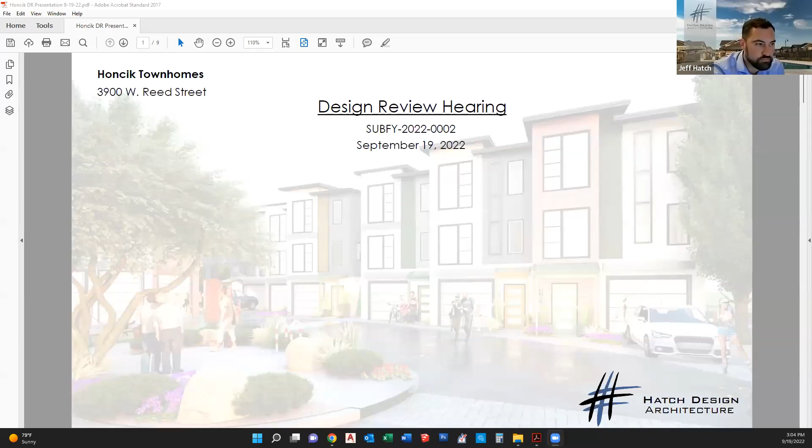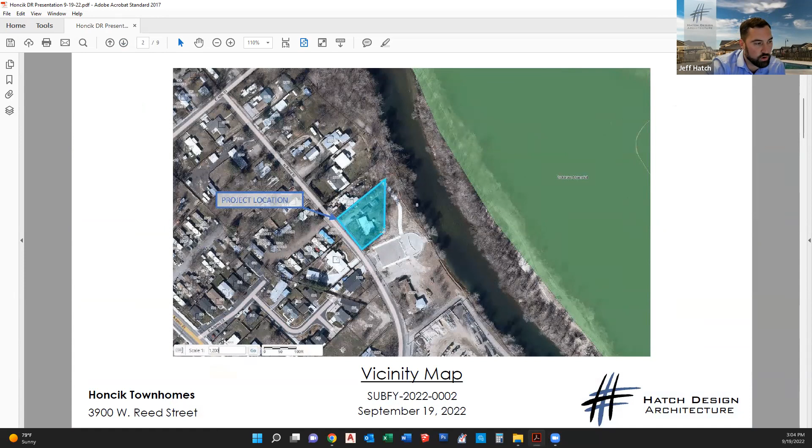Thank you for your consideration of our design review application. From our last hearing, the request was primarily to clean up and clarify documentation, so I wanted to briefly go over what we've done the last two weeks. As far as the site, just to familiarize ourselves, we are adjacent to Heron Park. This property is actually owned by the city and is part of Heron Park. Last time we talked about the enhancement of the pedestrian pathway and how that connectivity resolves the issue of not having any public connection to that park from the sidewalk.

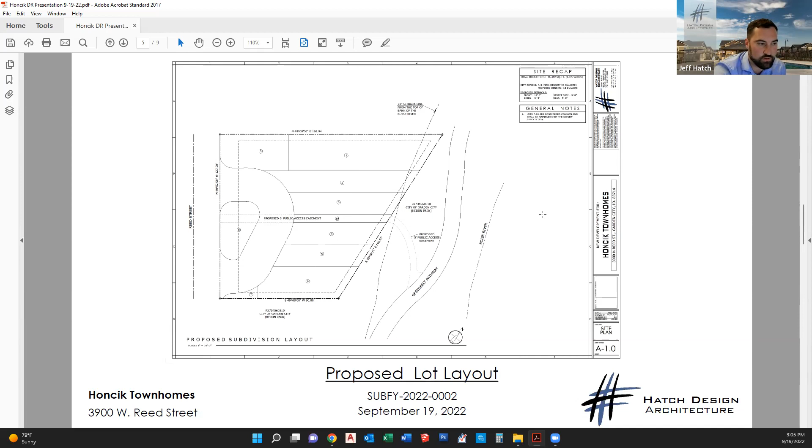One of the coordination questions was in regards to the common lot areas. One of the late exhibits is the actual layout of the property lines and the common areas, so that we could highlight and justify the tabulated calculation to city staff as far as how we came up with our justifiable square footage for our common areas. The other request was to engage the city and be able to provide the committee with a mechanism as far as how we would go about acquiring the public access we are proposing. In discussion with city staff, it looks like we would have to request that access from the city council. So that would be something we'd be fine proposing as a condition of approval, which we would then present after our P&Z and subdivision applications are processed.

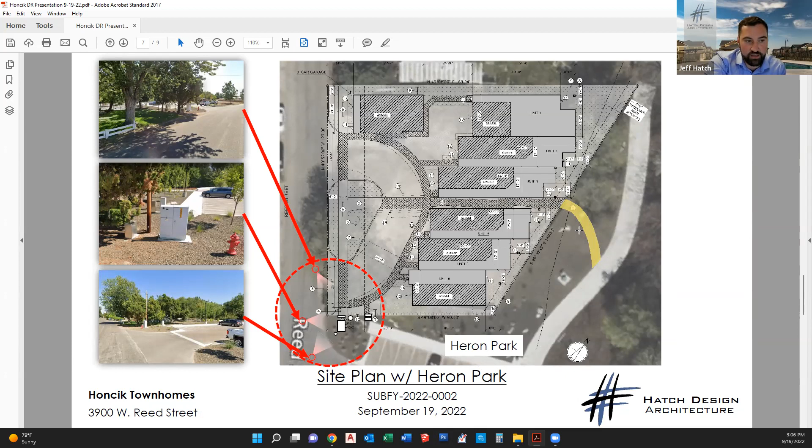So at our last hearing, we discussed some of the complexities of trying to route a public sidewalk in this manner, which provides the access through the center of the property. There was some discussion about potentially meandering this back to the public sidewalk. I would probably leave that to the discretion of city council, since they're the ones approving that, but in general we would be conditioning to provide a public access connecting to the park.

So in summary, the three primary design review related items: the question about the open space — we've tabulated our open space at a total of approximately 13%, so we're able to justify that. Question about the parking — parking proposed will be on the common lot, which we've now provided a clear exhibit as far as that intention, and that can be coordinated with the HOA. And then the engagement with Heron Park and the Greenbelt, provided in those exhibits as far as how we would have that, and in addition we are proposing publicly accessible labeling and wayfinding for that access.

In addition to what we've summarized here, all the documentation has been coordinated with Hanna. To the best of my knowledge, the site plan now matches the landscape plan, matches the elevations, so all that stuff has been clearly cleaned up and identified in a more proper manner. And with that, I will stand for any questions.

Thank you. Any questions for Mr. Hatch?

None of the modifications or additional documentation addresses the elephant in the room that we keep coming back to, which is the street front presence and street front engagement. Is that correct? That is correct. Okay, thanks.

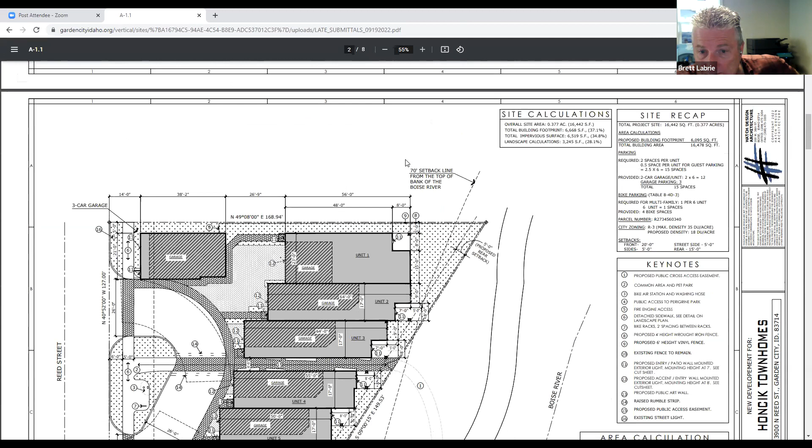Hannah, can you scroll back to the landscape plan there? Next one down, maybe. Oh, next one.

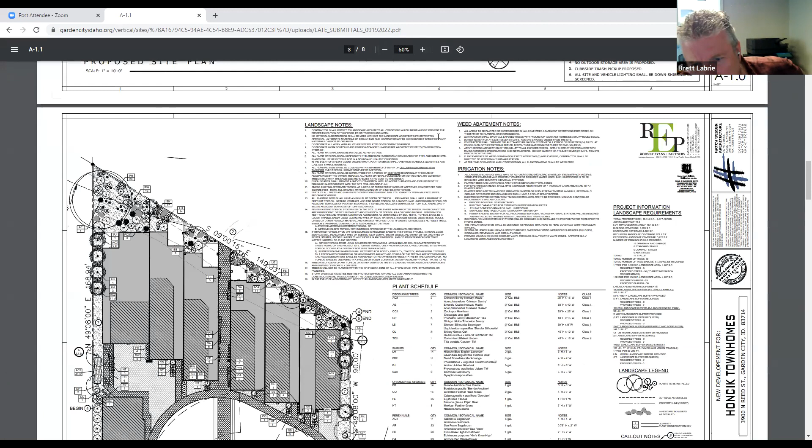So I was looking at that first page in the submittal packet, and it looks like they have isolated the guest parking space onto its own lot. I'm not sure what lot 7 right here is intended to be, or 8, but it looks like the common drive isn't its own lot.

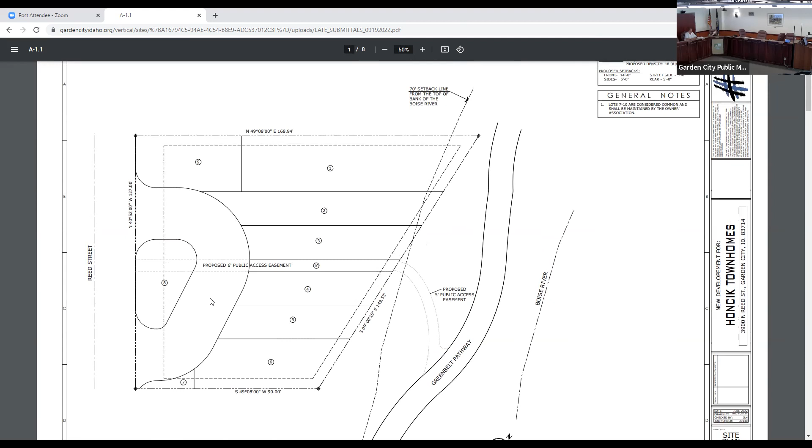It's a little difficult to interpret, so still not enough information to review. So we could leave it in and then that could be addressed as a condition. Potentially, yep.

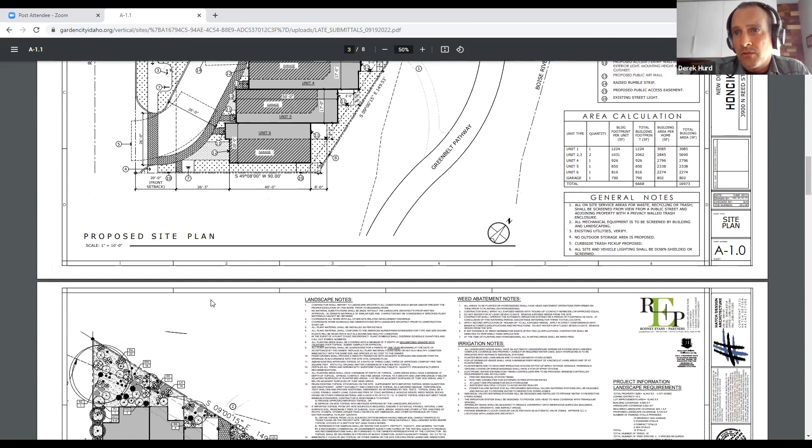Then the next item's 84L3, and that's open space - talking about removing all mature trees. No easements.

And so maybe, because now it does connect to Heron Park, we can strike that section. Yeah, I think scroll up further, Hannah.

Can you go up just a little bit further?

I guess that stays because there's still no easement. It stays, but it could be conditioned later to develop an actual easement with the city. It's kind of a timing and process thing. So maybe the connection to Heron isn't applicable anymore, but the lack of easement is still applicable. Yeah, so we can strike. We're not going to strike from the staff report, but 84L3 still stays. Yes, it does.

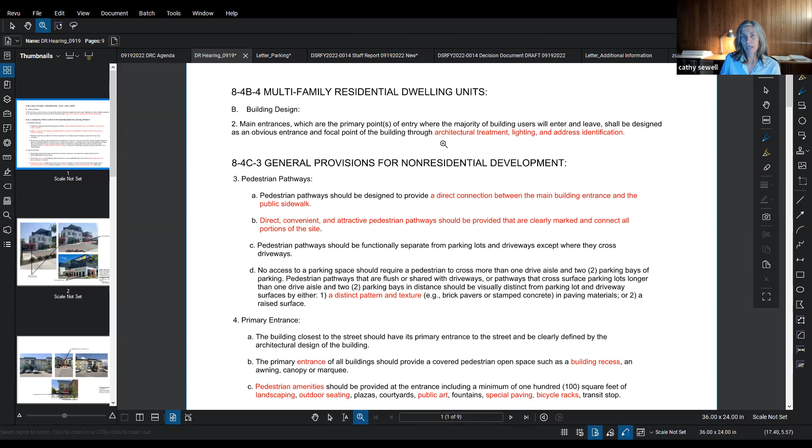I wanted to highlight and quickly go through the non-residential provisions. We do think the pedestrian pathway applies, because it mentions building entrance—a direct connection between the main building entrance and the public sidewalk. Once again, we don't necessarily have a main building entrance, but we do have entrances that have a direct connection to the street or sidewalk.

Direct, convenient, attractive pedestrian pathways should be provided, clearly marked, and connect all portions of the site. This section D gets into when you have people and cars intermingling a little bit, trying to create some distinction between those pathways. I highlighted this section here, which we'll show in our plan—a distinct pattern and texture.

The primary entrance, item A, the building closest to the street, seems to allude to there being multiple buildings. For us there's just one building, but the primary entrance of all buildings—once again we just have one—building recess.

And then here are just some around that entry with non-residential landscaping, outdoor seating, plazas, courtyards, public art, special paving—all these things considered with non-residential development.

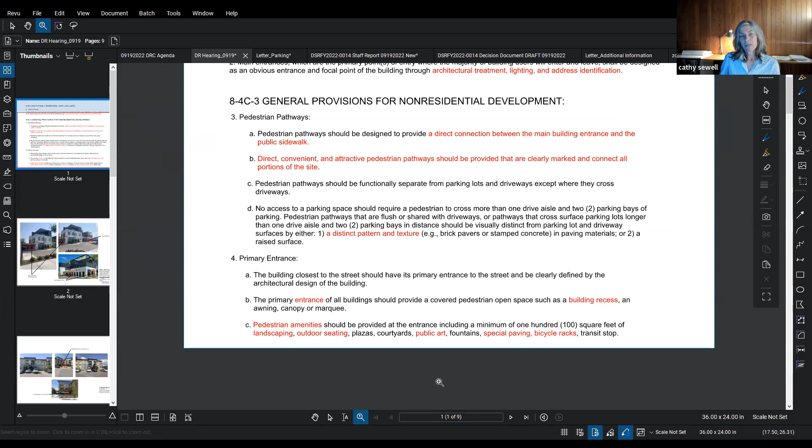So as I mentioned, we tried to find some projects that were of our scale, mixed use, multifamily. The first one we found, right around the corner from us at 35th and Clay, is a mixed use development. Property size is basically what ours is, around 12,000 square feet. This project, however, was reviewed as non-residential under code section 84C, even though there are residential components to it.

The non-residential use on the ground floor is about 1,700 square feet. On the second floor—this is the original application, I know it has changed—the non-residential portion on the second floor and residential use is about 1,100.

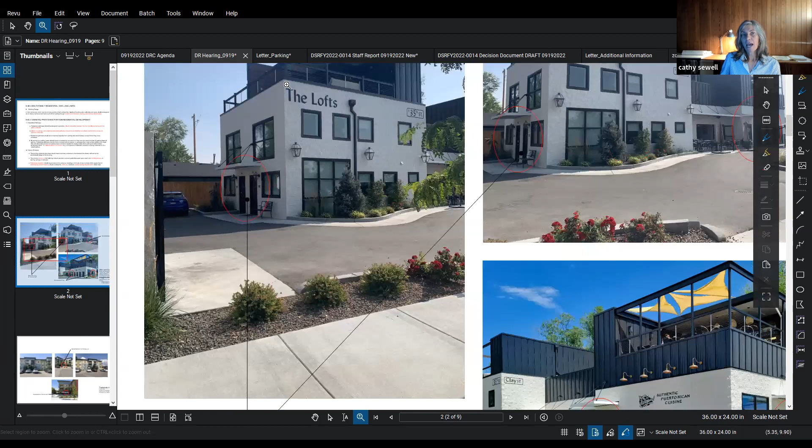So here we're looking at how the applicant handled the residential entry to this mixed use building. On this side, there are 2 units, and this is their residential entry. In terms of architectural treatment, there's a canopy noted, some lighting, and building identification or addressing associated with that.

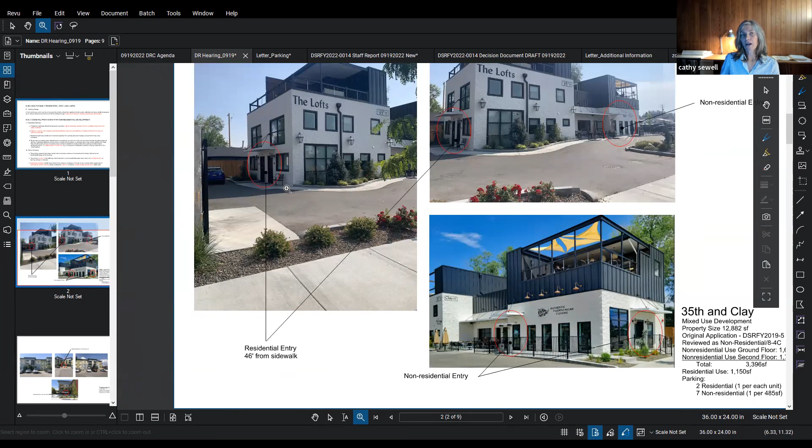One item of note: our entry into the residence is around on the side. This residential entry is approximately 46 feet from the edge of the sidewalk. Our proposed project has a residential entry of around 30 feet, so we're actually a little closer than they are, with a direct footpath—our entry, as opposed to theirs across a parking lot.

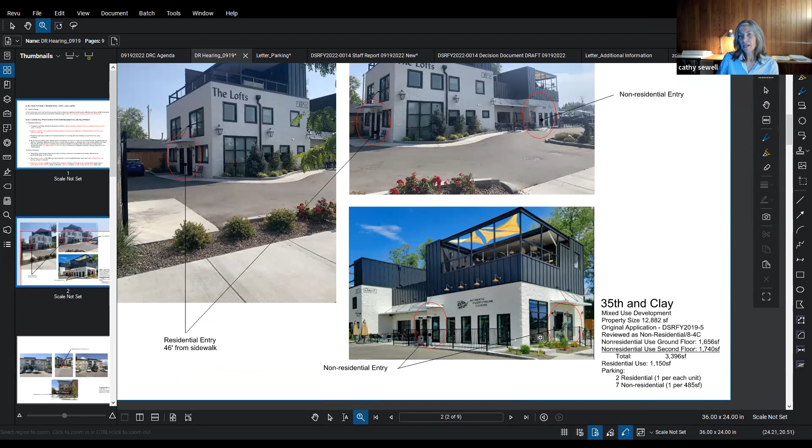I just wanted to note the non-residential entries. There's one facing 35th and one facing Clay. Both are articulated similar to the residential one, with a canopy, some addressing, and light fixtures. There's a direct path connecting to the sidewalk along Clay, but on 35th Street there's no real direct connection—there is an ADA access aisle, but that's part of the paving system.

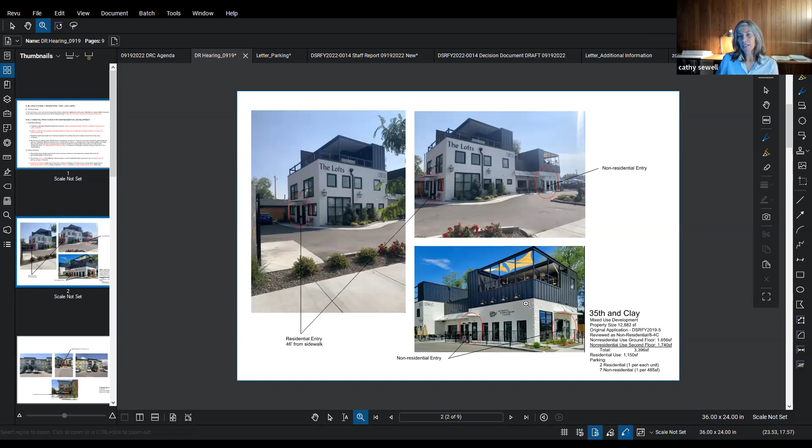So this project we thought was relevant since it's mixed use, right around the corner in our neighborhood, and small scale. The next project we looked at was Trailwinds. This one has been mentioned in the staff report primarily for parking, but it's a full multifamily development, much larger in size, over 2 acres, with 68,000 square feet of residential use. This is over off of 42nd.

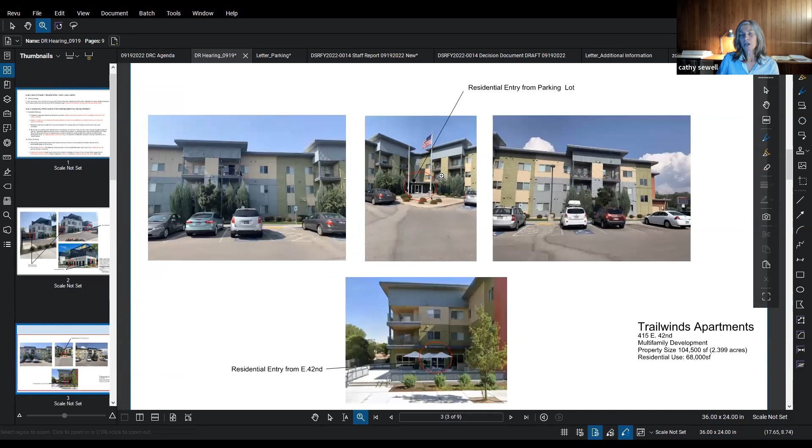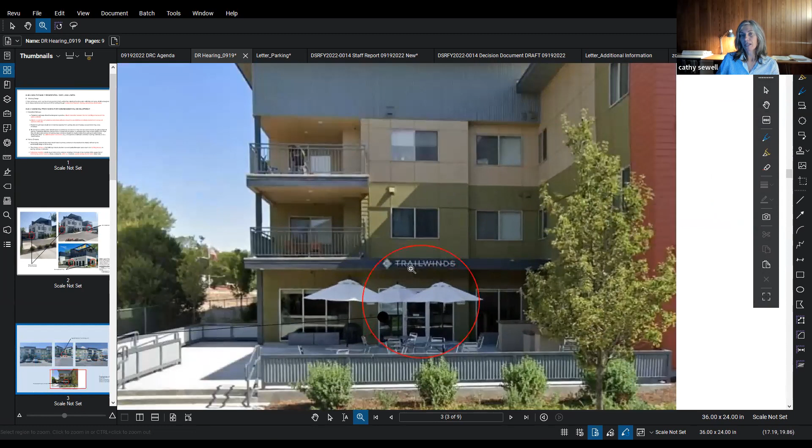They have 2 entry locations. The first has a big parking area—this is the residential entry, with articulation of the entry including a covered entry and signage. Then there's the other entry element off of 42nd, similar to the one off the parking area, with signage, canopy, and sidewalk connection to the entry from the street.

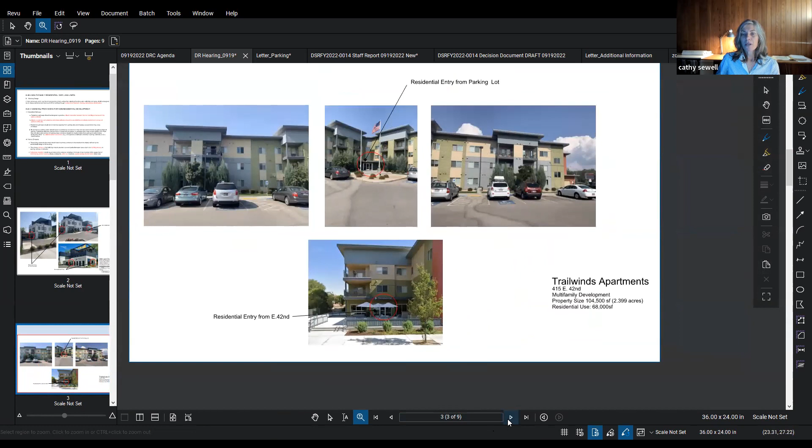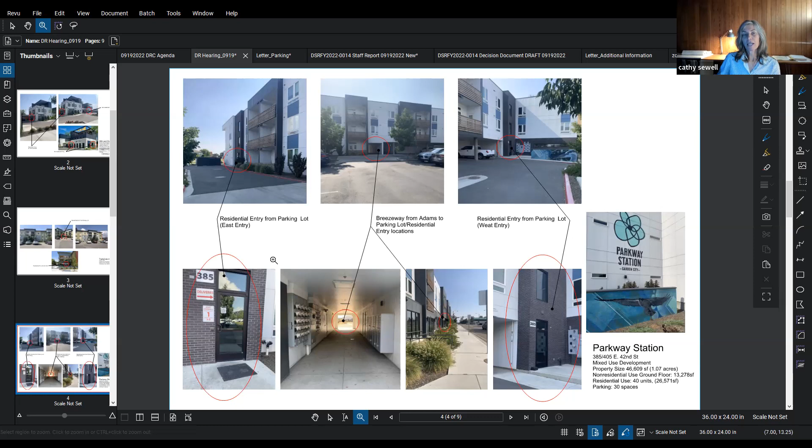The next project, right adjacent to this one, is Parkway Station. This is a mixed-use development on 1.07 acres, with non-residential use on the ground floor of about 13,000 square feet and 40 residential units. We only counted 30 parking spaces, which we thought was interesting given the number of residential units and non-residential use. I don't know how that was calculated, but there's definitely not one parking space for every unit.

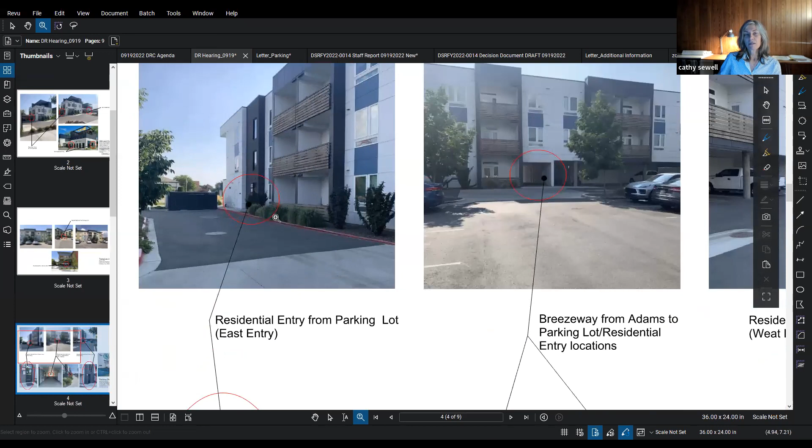But I just wanted to note how the residential entry locations are articulated. Both entries into the structure for residents are off of the parking lot. There's the east entry here, which I think uses brick to articulate the entry, with addressing down here. Then here is the west entry element, once again with brick detailing and some addressing at the door.

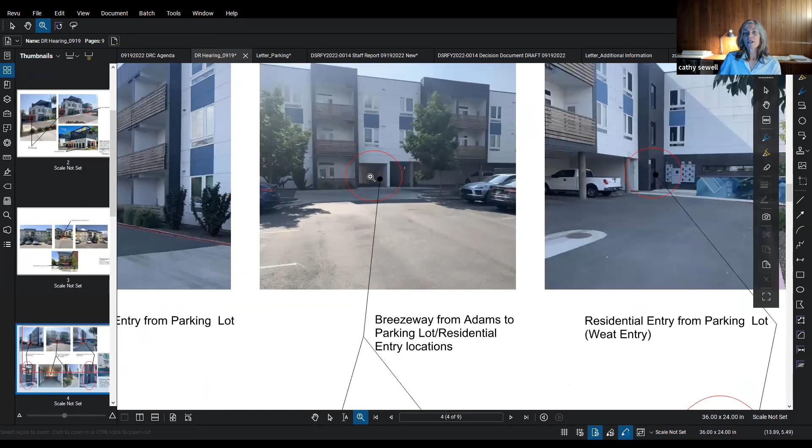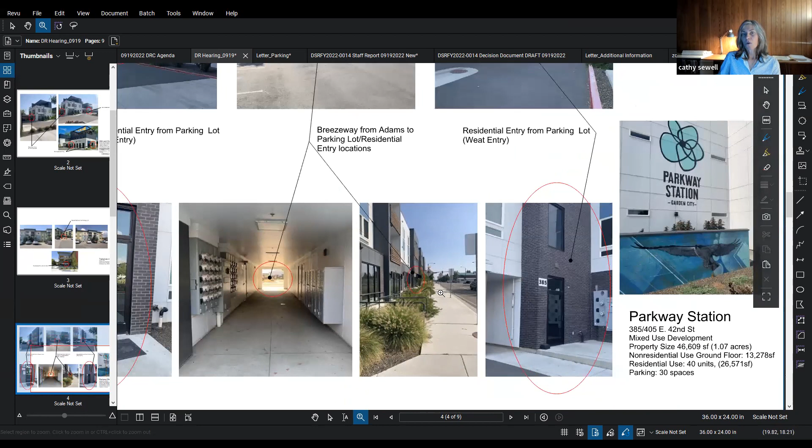This is a breezeway that takes you from the parking onto Adams Street. Here's a shot looking from the parking lot through to Adams Street. Once you get to Adams Street, this is that location—there's no signage to indicate how you get to the residential units. So I'm not sure how that's achieved, but at least in terms of how those residential entries are articulated, they've used some brick, they've got their signage, and that's about it.

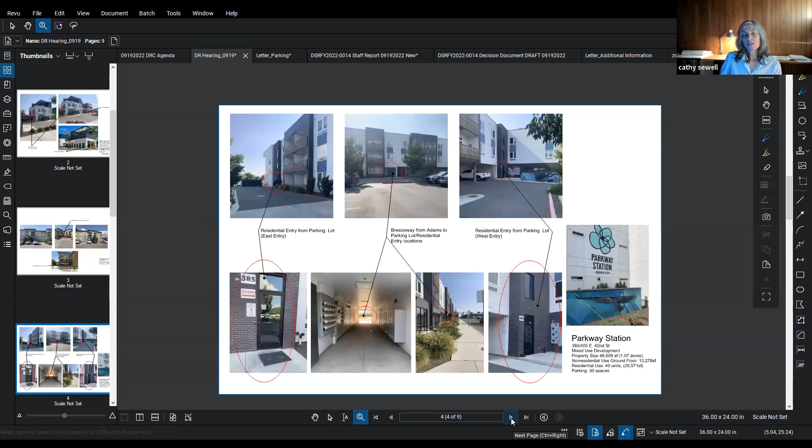So now we want to walk through our project from when we first had our pre-app design review hearing on the 20th, what our proposal was then, and how we've revised it based on meetings and comments. To reiterate, this project is mixed use primarily. We have a small ground floor retail or commercial space, and this is the entry into the garage for the residents.

So from that meeting, we had comments and concerns about our entry, some issues with that. So for our September 8th hearing, the changes that we made - I know we had comments and questions on the residential, but we want to address all our entry points, because I think you have to talk about all the entry points to understand the project.

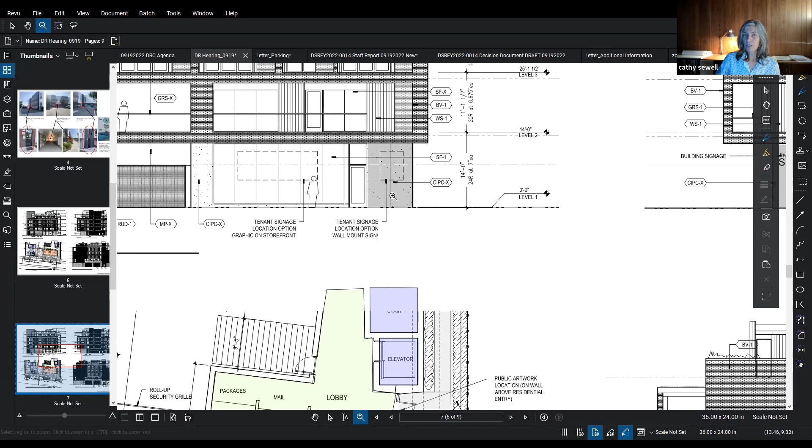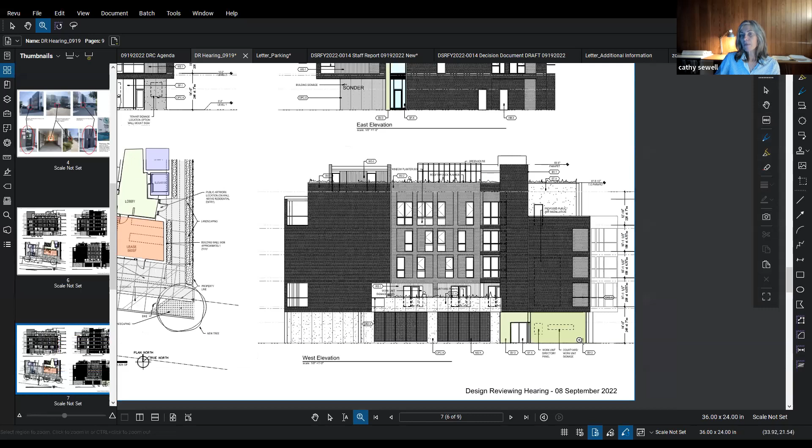But as we move to the actual residential entry, we introduced building signage, the Sonder, and then we also took our entry element up to 2 stories and introduced a glazed brick architectural treatment for that recessed area. We also carried that same material into our courtyard entry location, where we started to introduce the directory for the work units up on the courtyard, as well as the building name identification for that courtyard.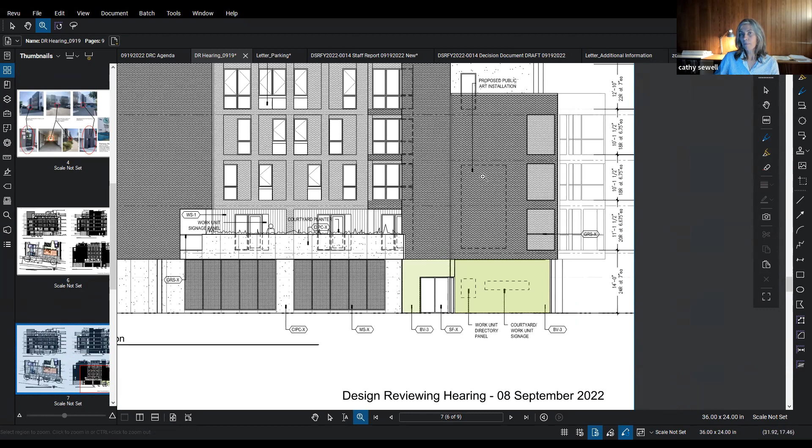One item to note is that on each of these entry locations, for the residential and the courtyard, we are proposing some form of public art installation above those areas. This one up here would be directly above and in line with the residential entry.

So here was from September 8th. And then we understood there were concerns. Unfortunately, we didn't get a chance to discuss this with you both, but we did understand the concerns. So for our submittal that we made on the 12th, here are the proposals that we made.

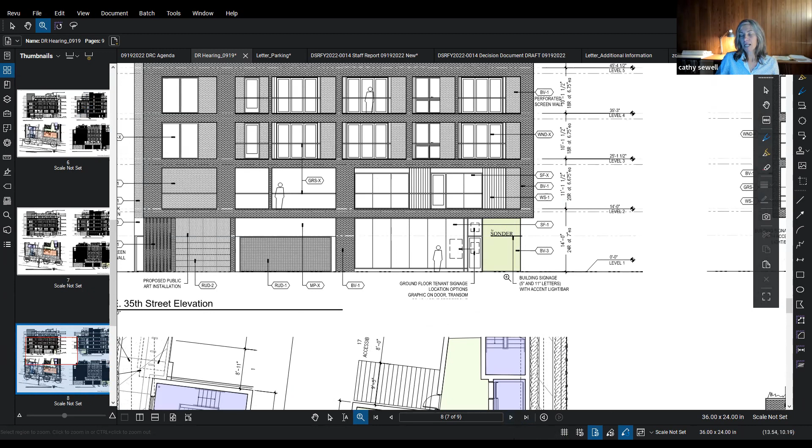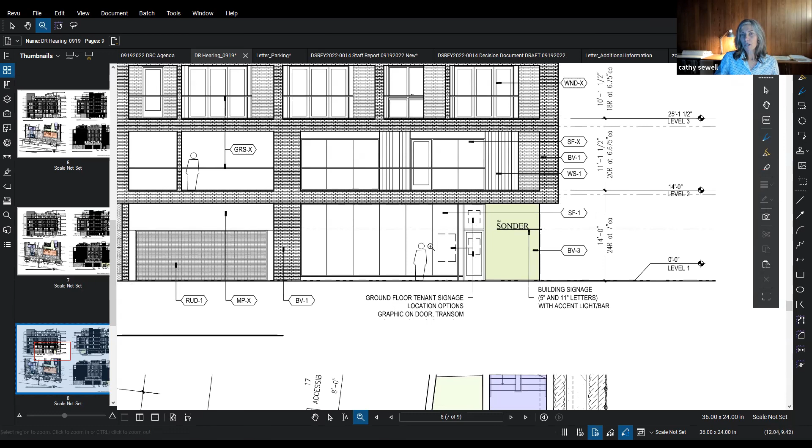For the building, we carried that accent glazed brick to the front. We created a smaller building signage name for just the building, the Sonder, and we're proposing that this be lit with some horizontal bar, low level lighting at that location. We've moved any kind of ground signage, because we don't know who that tenant is yet. The ground floor tenant signage will either find itself as a graphic on the windows or the door, at least right now - that will get flushed out later.

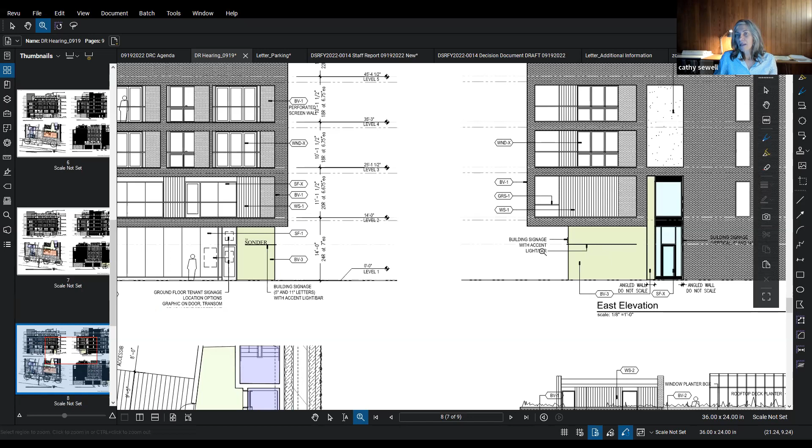Moving to the residential entry, we've carried that material all the way. It still comes up in that 2-story space, which is somewhere around 23 feet high, so it's a pretty grand entry. We extend that light bar along there, and there'll be some landscape pots along here to help direct that in. We've also maintained that same glazed brick along the courtyard entry, introduced some signage in there, and still have the directory.

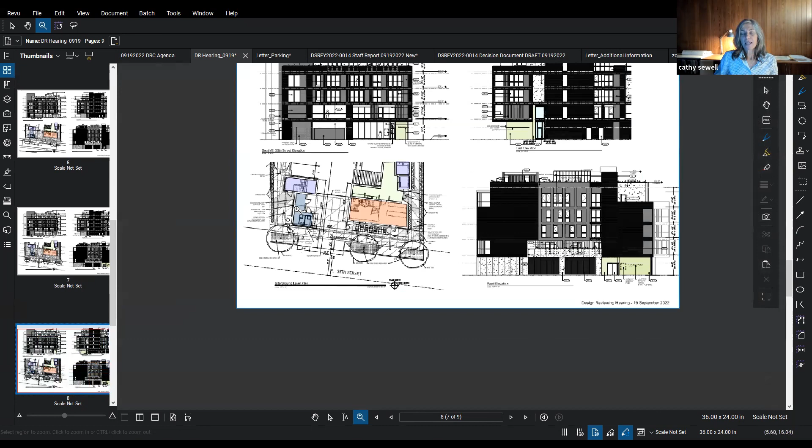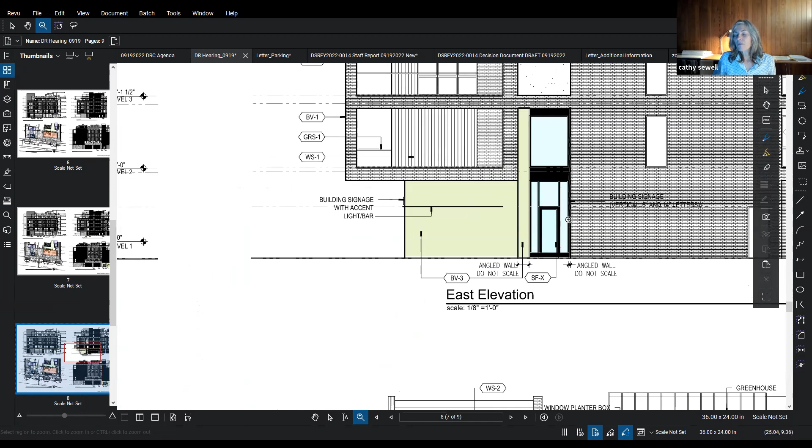In terms of the ground plane - what you couldn't see in that, but you'll see in the renderings - we have a much larger, approximately 14 inches wide by 11 foot high building sign that will go up that vertical face right here. So that vertical sign goes all the way up. And in terms of the ground plane, and I realize it's kind of difficult to see, we've introduced different score patterns, and also changing concrete finish, so we carry that through those main areas of entry locations.

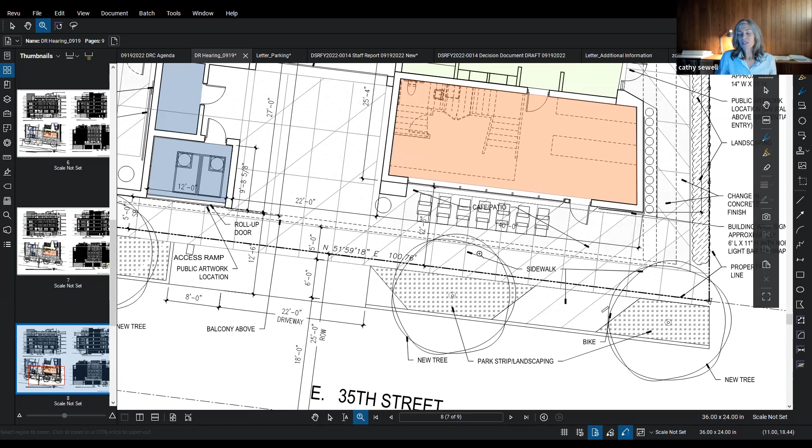We are hopeful that there will be some pedestrian connectivity here, with people sitting out there engaging with the street. And so that's part of the reason why we show this here, is that we think this is going to be very easily read as an entry for the space.

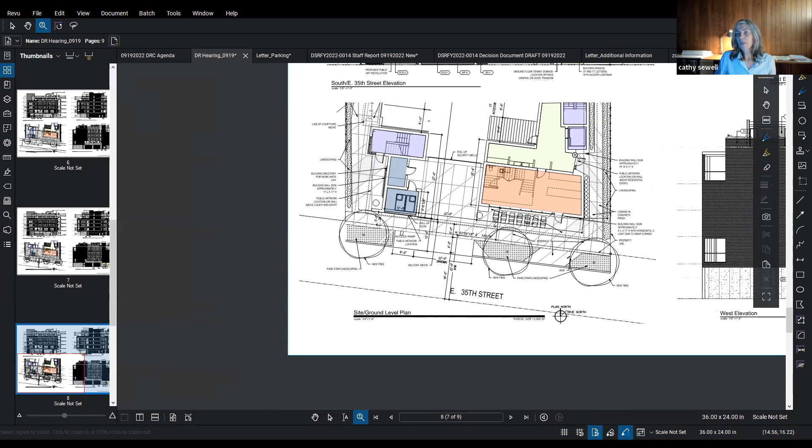We're not trying to commingle entry locations, because in all reality the residents are going to come through the garage into the building through this door and up the stairs, into the mailroom. So with potentially very little coming and going here, we just wanted to note that we don't want to accentuate this entry, but we do recognize that this is going to be a primary entry and exit for the residents.

So this is the sheet that we did submit, that you have hopefully in your packet. I wanted to go through those changes on this rendering. Here's that glazed brick material we've introduced up front on the street, carried around the side, up this two-story element. Here's the larger Sonder signage.

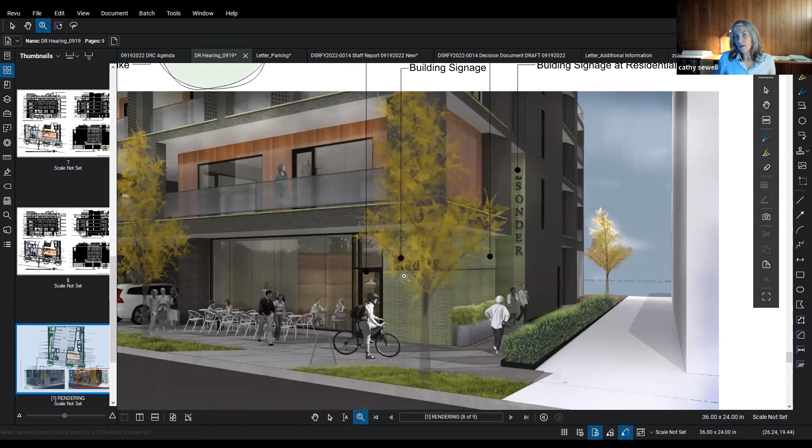This will be low level lighting. We also want to introduce low level path lighting at least through these locations and back through here, because we anticipate that, especially if that courtyard comes online and we are part of that Friday walk, that could extend into later evening hours, where we want to make sure that's well lit back through there.

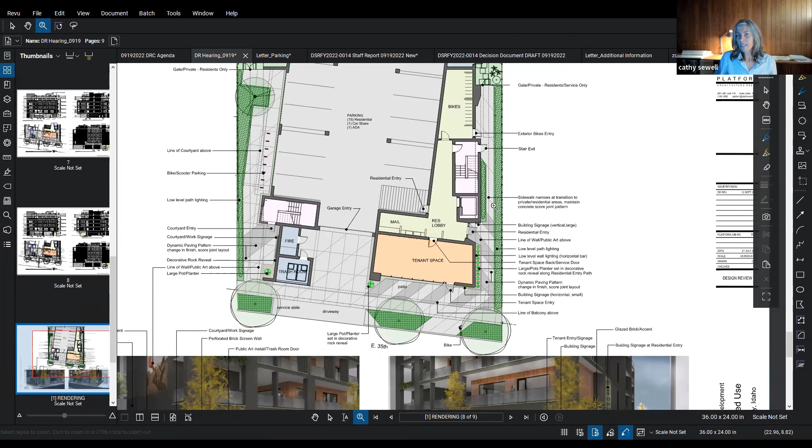And same with the residents, they do have their bike parking back here, so we anticipate that they would come back here to park their bikes. So there will be some low level lighting through there.

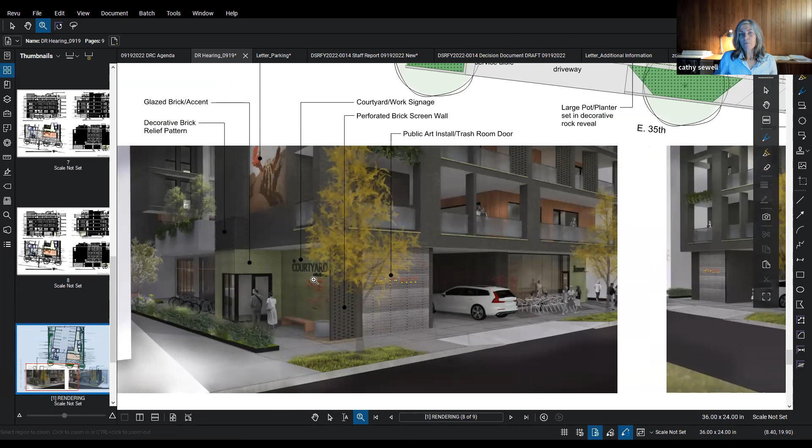Back to this rendering, here's that ground floor commercial space, possibly some signage there, but this is primarily the residential entry transition back in there. This is the entry to the courtyard, to the work units, public art, something happening up there. Here's our garage entry, but once again that glazed brick used throughout the building, just at entry locations, and our signage.

And then just to quickly walk through this plan sheet: we have some bike parking up front, we have a lot of bike parking in the back, and our pavement pattern through there.

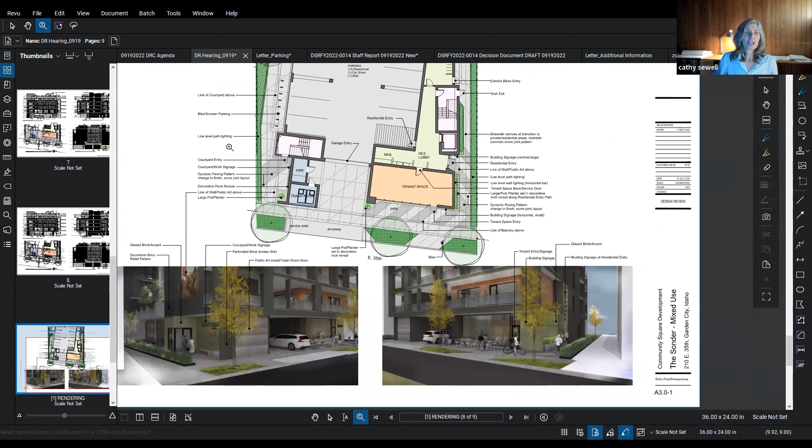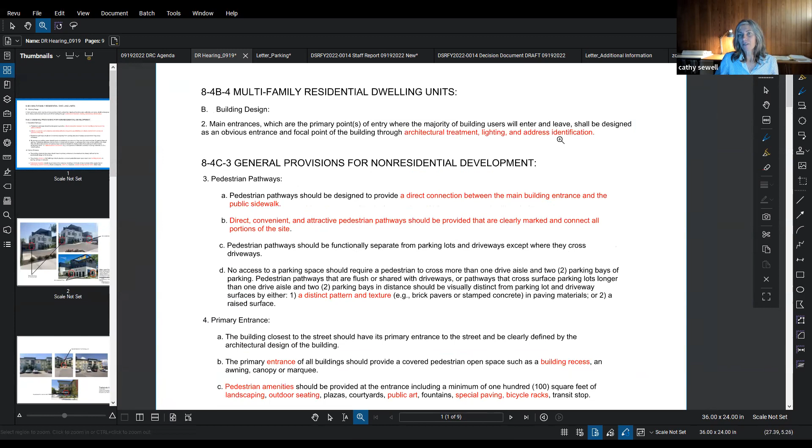There's our revised entry. I just want to go back real quick to the criteria which we have to work with to articulate those entries: architectural treatment, lighting, address identification. I think we showed in our homework that there are various ways to do that, but in terms of what we've provided, we think we've provided an articulated entry through the treatment of the building materials, through our landscape, through our paving.

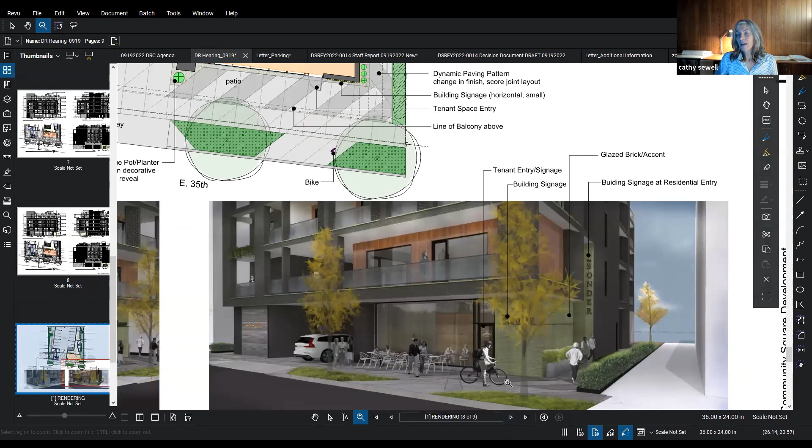We have our signage, addressing, we have lighting. So based on the criteria in the code, we believe we have a compliant project that could meet not only the multifamily residential dwelling unit entry criteria, but also non-residential. So with that, it'd be great to have some comments on that before we head into the parking.

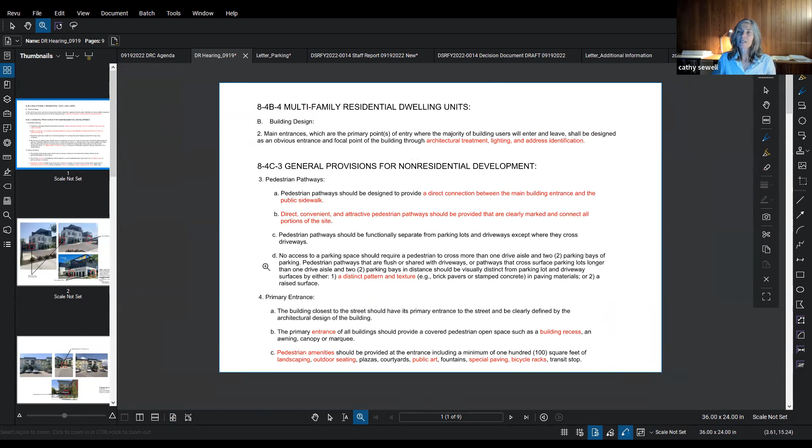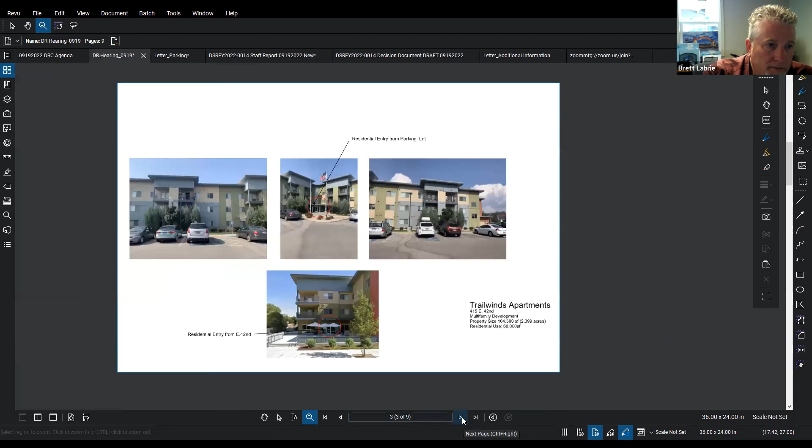Thanks, I appreciate you walking through that. I really think the effort of what's put forth here, and the different techniques you've used, have in my mind really strengthened that connection quite significantly from what we saw before. It still has a little subtlety to it, if you will, but it's come a long ways, and I really appreciate what you've done, because it really does what I think is intended with the code, to provide that identity for that element of the mixed use building.

Yeah, I like it, I think it's working really well. As Brett said, some of the additional elements you're using, we see a ribbon light on the front, but that pulls us around back to the side and gives us a hint that there's something else going on there. The use of colors and that texture, what's modeling as green in your model, tells us there's something else going back along the side there. And with your landscape buffer and the neighbor's landscape buffer, as we come along the street front, we're going to see this building from the side, halfway along the side. So those are pleasing entries, and I think it works well and satisfies what we're looking for.

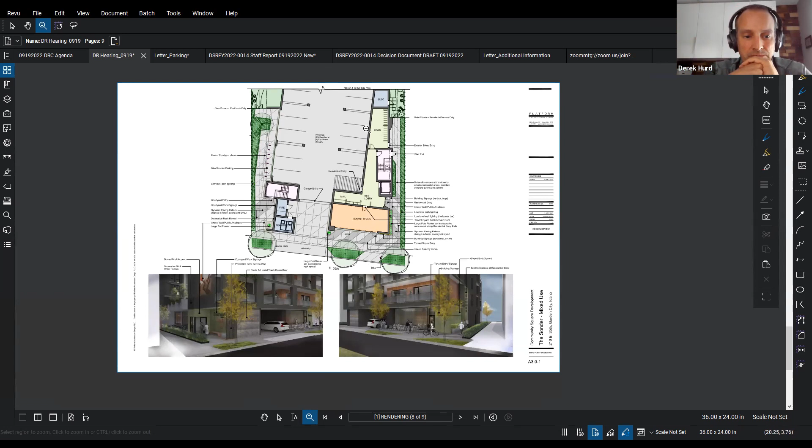Okay, great. So now to the next one. This is the parking letter that we submitted, and I guess I just want to, because it was a late submittal, walk through the information.

Now, all of this information is found somewhere in the other submittal information we provided, but we felt we needed to isolate it and walk through where we got it. As we understand it, the design review committee are the ones who will make the determination on our non-residential parking requirements. So we want to walk through this letter, stop, and get some feedback from you both before moving on.

Per our design review meeting comments from September 8th, we're providing additional information regarding the parking demand for the project. We believe this will be useful for the design review committee's evaluation, as Garden City Code does not provide explicit objective parking requirements for mixed-use buildings. In absence of those standards, we referred to other sections, including the residential parking requirements, while honoring that the code clearly states alternatives to on-site parking are encouraged, per Garden City Section 84D-6.

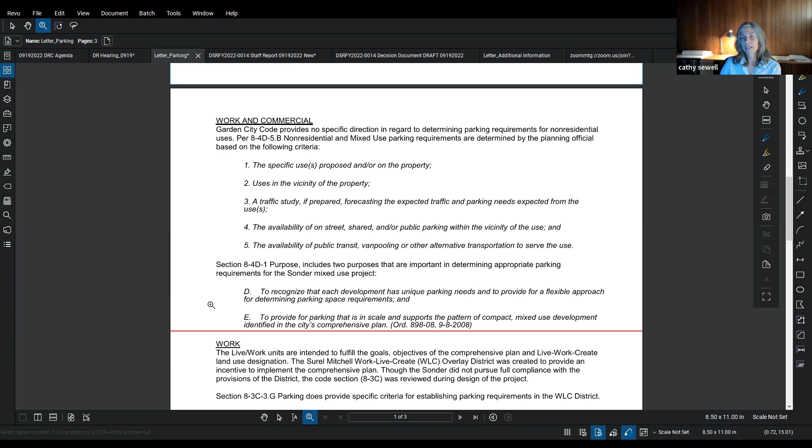The overall parking code, section 8-4D-1, has a purpose, and we think there are two purposes important to determining appropriate parking requirements for the Sonder mixed-use project: D, to recognize that each development has unique parking needs and to provide for a flexible approach for determining parking space requirements, and E, to provide for parking that is in scale and supports the pattern of compact mixed-use development identified in the city's comprehensive plan.

So with the work units - the work units are intended to fulfill the goals and objectives of the comprehensive plan and live, work, create land use designation. The Surel Mitchell Work, Live, Create Overlay District was created to provide an incentive to implement the comprehensive plan. Though Sonder did not pursue full compliance with provisions of the district, code section 8-3C was reviewed during the design of the project.

And so here's where we reference section 8-3C-3.G, parking. It does provide specific criteria for establishing parking requirements in the district. Once again, this is something where we were trying to review what criteria needed to be reviewed to come up with a number. Even though the code doesn't have anything for non-residential, we at least saw some mention of parking in that area. Number 2 is: no off-street parking is required for working spaces less than 500 square feet of interior floor area. So our workspaces were specifically designed to be under that limit, so as to not require any parking for those.

We believe this specific criteria can be used to determine requirements per code section 8-4D-5.B, specifically items 1 and 2, which look at specific uses on the property and uses in the vicinity. In this case, the uses are based on the goals and vision for the live, work, create land use areas. So with our 7 work units under 500 square feet, we have indicated there is 0 parking required for those. We'd like some comment on that.

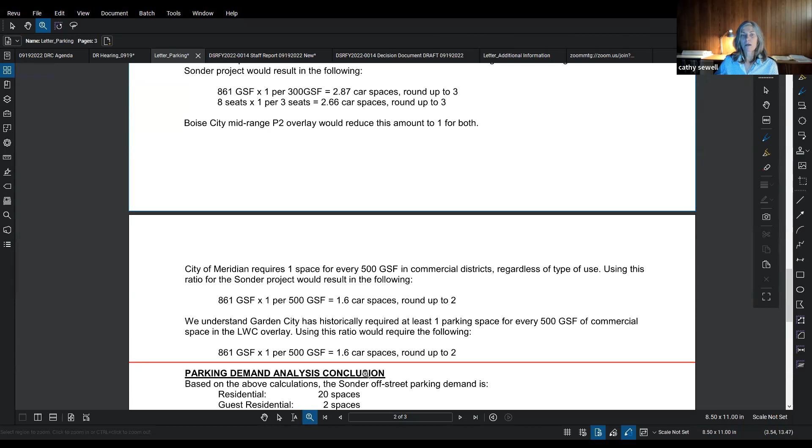So I guess in terms of this analysis, can we get some feedback on that?

2 spaces? Well, yeah, I mean, I think that the calculation there with the 300, 1 car per 300 square feet, is typically what staff has done for commercial space in Garden City.

So the 3 spaces, does it qualify? There's no overlay. Does it qualify for a reduction? I guess holistically, again, there's room for reduction, but quantifying that is the part I'm not sure of. When you start looking at what's provided in the reduction, it's almost as if...

...the number of parking spaces for people visiting this mixed use project is what's lacking. Even if I could get there with the rationale for some reduction in the number of cars for the residential component, there's still a number of people that are going to be coming to visit the residences. There's going to be people coming to visit the live workspaces, even though they live there and work there. I think that's still going to see a certain amount of traffic, and that's the reason for that as a commercial type space.

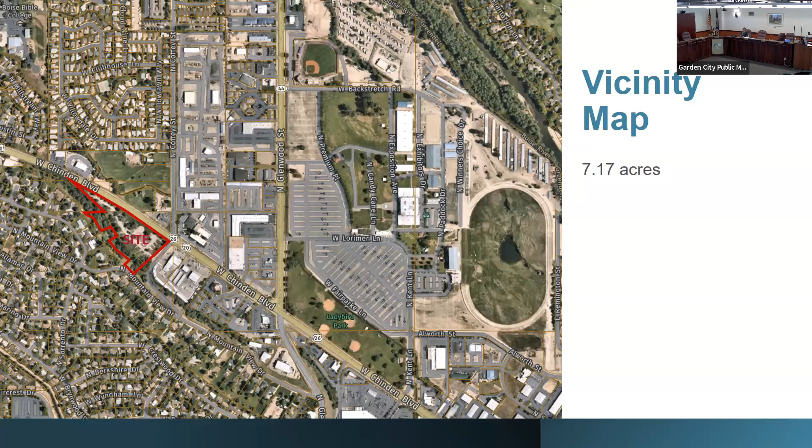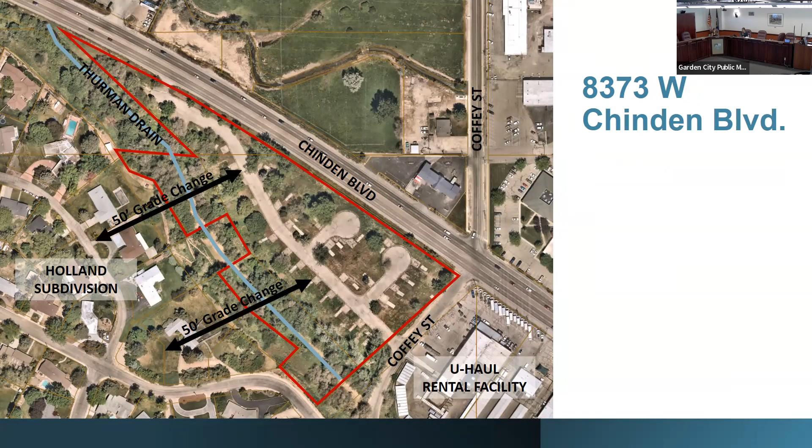Again, the project is west of Chinden and Glenwood, and is 7 acres. It's important to know it does hit the intersection of Coffey and Chinden. However, on the south, rear side of it is a Thurman drain, and then there's a 50-foot grade change between the parcel at Chinden Street level and the subdivision to the rear, which is the bench, as most people know it.

Regarding parking, this will be short and sweet, but we meet the parking requirements, and that includes guest parking as well. Happy to talk about it.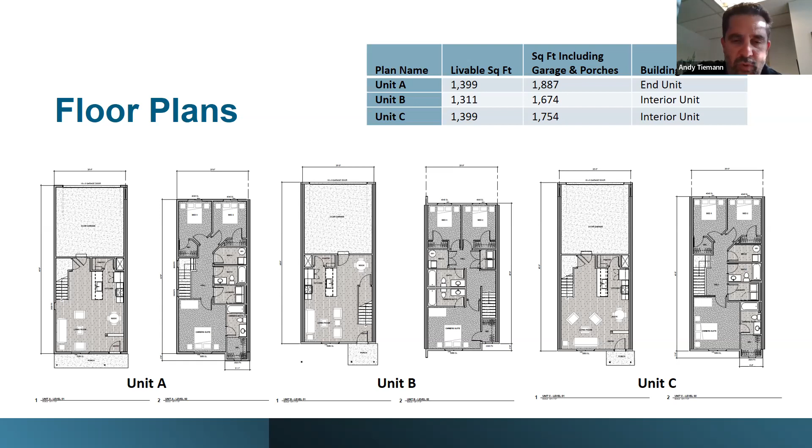And our floor plan, so we have 3 different units. Our livable square footages are listed here on the table, about 13 to 1,400 square feet. And then with the garage and porches, we're ranging from 1,600 to almost 1,900 square feet. The A unit is the exterior end unit, and the B and C would be our interior units that we are proposing.

And so unit variation, so site location. We're looking at different price points with each product, each living unit. So the site location will mean more like lot premium. For example, the interior unit facing the highway would be priced different than an interior unit facing Thurman Canal or internal to the open space area. So we will have different price points by each unit, and also different price points depending on the location of that unit.

We're also providing variety with interior and end units, and patio sizes will also vary between the units. And then the facade treatments - like I showed earlier, there's different facade treatments that we're proposing with siding. We'll also have multiple color schemes as well throughout the community.

Something else I want to touch on is the livability of these homes. They really feel like a single family home, and they're very popular. We've built a number of these homes in many markets, and they're well received. It hits a very wide demographic of lifestyles - single people, young married couples, young families, empty nesters. We're getting a very wide variety of homeowners that just love these homes. It's been a trend for us also because being single family attached, it feels like a single family home, but it also provides relief from maintenance that people are looking to avoid. So it's a great home for people.

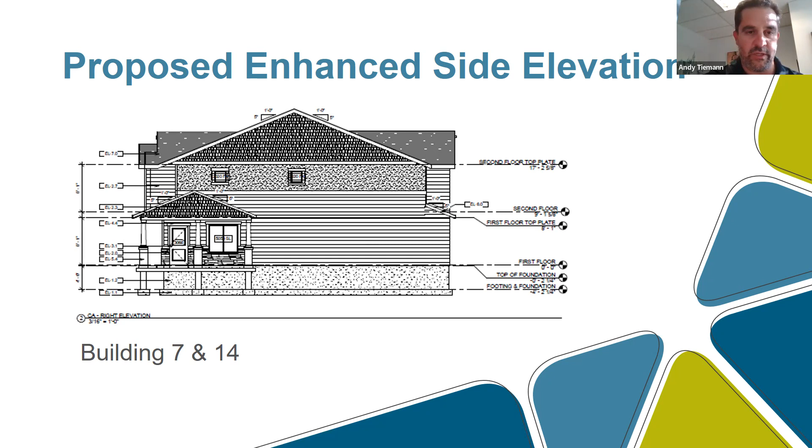And then also in the staff report, it mentioned buildings 7 and 14 on the side elevation. What we proposed was a standard side elevation. We recognize the comments, and so we've prepared this enhanced side elevation for buildings 7 and 14, making the entry on the side so it has a nice front facade along Coffey Street.

Nicolette, would you like to take on? So we know that we're required to provide 6 sustainability points.

So on our site, we do have the multi-use pathway on Chinden. We showed it earlier but didn't hit on it for very long. Basically, there will be a 10-foot pathway on our site along the whole Chinden frontage. And then there will be sidewalk as well, detached sidewalk on Coffey, greatly enhancing the pedestrian connectivity and network in this area, which is currently, I believe, just nothing at this point.

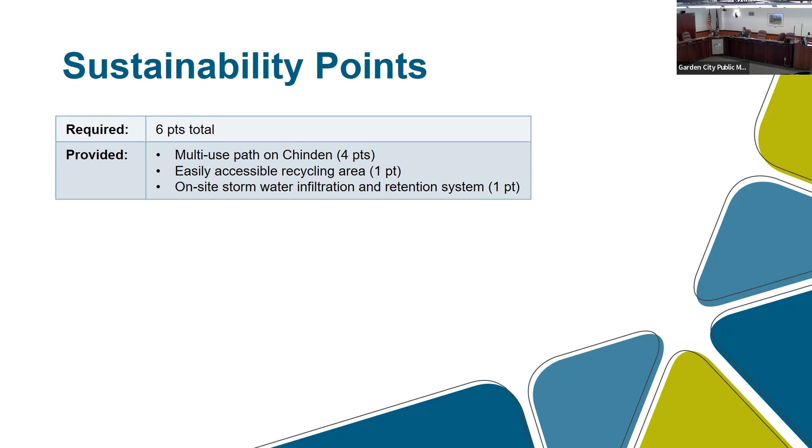We'll also have an easily accessible recycling area for another point, and an on-site stormwater infiltration and retention system.

We have submitted our review to ITD for some time now. They are committing to providing their comments by October 3rd. It's important to note in the traffic impact study that access to Chinden better distributes the trips and makes the project function better overall, and it's actually recommended by ITE that we keep the Chinden access. However, should access be denied or restricted to right-in, right-out, or emergency only by ITD, then the existing access on Coffey is sufficient, and we'll be able to react on the site plan.

We just recommend and request your recommendation of approval of the design review permit. We'll stand for any questions.

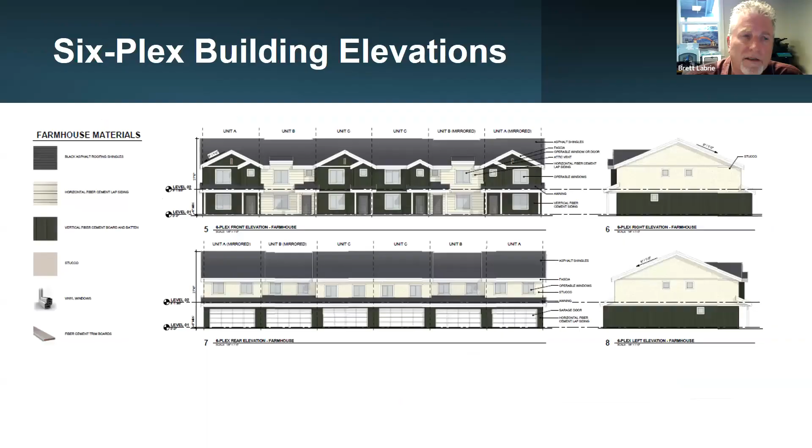And now we'll hear a report from Hanna Veal. Good afternoon, or I guess evening at this point. So this proposal is subdivision fiscal year 2022-0005, Coffey Townhomes.

It is a proposal that consists of 76 two-story, three-bedroom townhomes with access off of West Chinden and Coffey Street. The proposal intends to keep the existing Thurman Mill ditch untiled and maintains the surrounding dense vegetation to the south. The application proposes a code compliant 190 vehicular parking spaces, and it is to be processed as a planned unit development.

As a planned unit development, the applicant can submit waivers to code standards such as minimum setbacks, to allow for 0-foot interior side setbacks of the townhomes; for allowing a greater number of lots to be accessible off of a common drive, since code only allows for 4 in a subdivision; and a waiver for the proposed non-compliant parking space dimension sizes.

However, the applicant has only formally requested one of these waivers, which is to allow for that 0-foot side setback for the townhome units. Staff has drafted the other 2 waivers in the condition document and the approval.

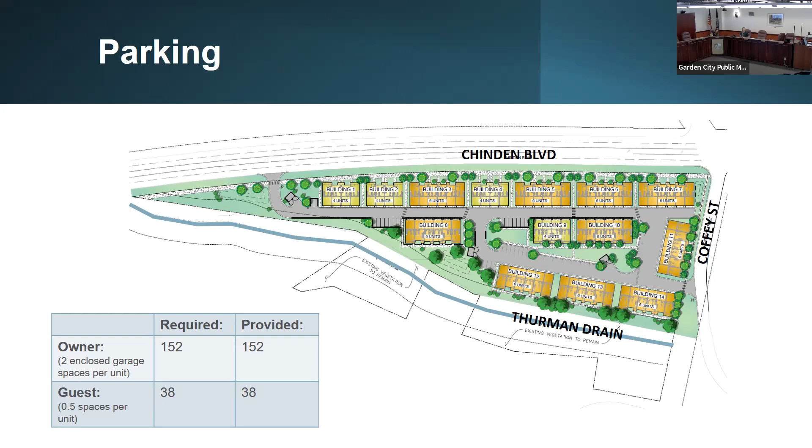Going through the project, it seemed beneficial, like on the previous project, to look through each item left in yellow on the project report. 8.4B3 discusses the need for improved modulation and entrance features on building 7 and 14. As we've shown here, we agree to those conditions and have no issues.

On page 14 of the staff report, where it discusses 8.4E5 private street standards, this project is actually more of a service drive and not a private street, more typical of an apartment community and a commercial facility. We are happy to accommodate the larger section if needed, but this should be sufficient.

Moving to page 15, 8.414 landscaping provisions for specific uses - we are happy to provide those additional trees, no problem. As you can see on our site plan here, which may not have made it into the staff report, we are happy to work through providing those additional trees. We do have street trees on Coffey Street and Chinden Boulevard.

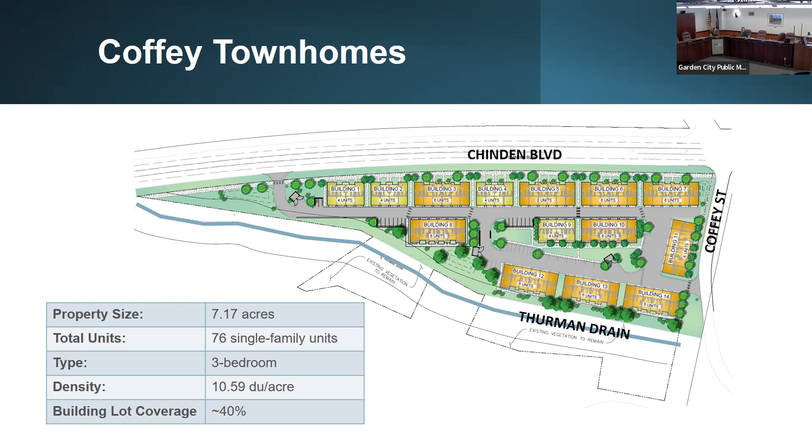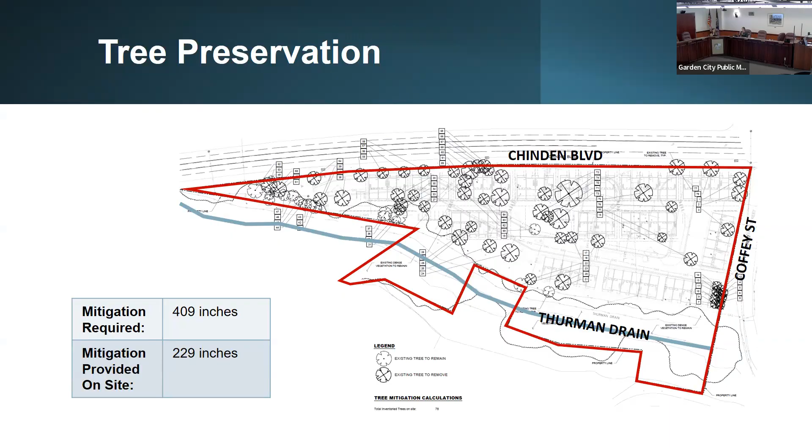The next one is 8.417 tree preservation provisions. We'll continue working with staff on code allowances. We did provide a tree mitigation plan, which we have here in backup for you. This is a big site with a lot of existing trees in questionable shape, but we were required to mitigate 409 caliper inches, and we've replaced 229 on site. So we're running out of places to put trees, especially with the existing canal easement, which we're trying to keep as natural as possible. We're happy to keep working with staff on alternative compliance.

And then 85A6 improvement standards. There was question about if we had enough variety, and we feel that there's a lot being built in Garden City right now at the 3-story level. This is a unique product in the community that reaches a more affordable price point, and there will be variations. So typically in other developments in Garden City, we're talking about a lot smaller of an area. On this size of a site, you see a lot of price variation between what is fronting with a more personable yard area on Chinden versus what is buffered from Chinden against the Thurman drain, and what is interior to the site. And in the townhome style product, there is a lot of price variation based on how many walls you share with neighbors. So the end units will have different price points than the interior units overall.

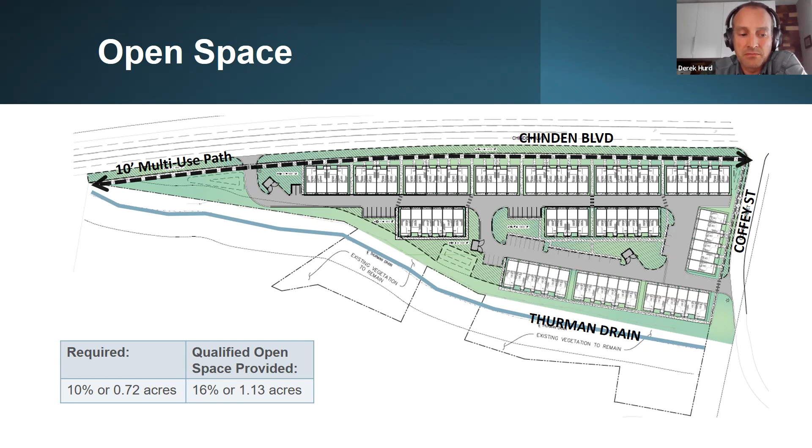Thank you. Any questions for Ms. Womack? So just one quick clarification, and you may have touched on it, but just to reiterate it: the common space areas, is or is not the Thurman drain included? It is not that space. Okay, great, thank you. Just the areas with the hatches on this. Thanks.

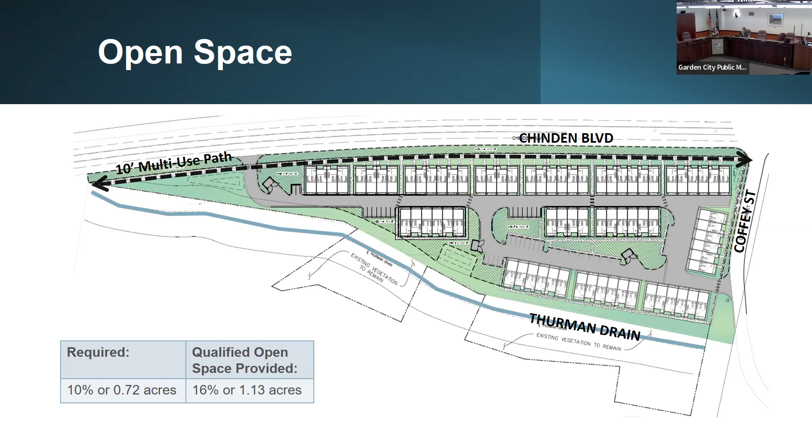I do have one question, forgive me if it's clearly in the packet, but the location of the trees on Chinden, can you remind us why they're back of sidewalk? So working with ITD, that was the location they discussed with us, so the sidewalk and improvements being back of sidewalk. But as we get comments, if there's ability to move that forward, we'll certainly discuss it. Thank you.

Any other questions? Right, thank you very much. We'll close the public hearing and open it up for discussion.

I'll start with an initial comment. It seems like we keep coming around to this issue with the response to street frontage and end type units. It always seems like there's a greatly missed opportunity for the end units that aren't abutting a neighboring building to have some different treatment, to gain more fenestrations in that facade fronting the street, bringing more natural light into the space, making a much more attractive unit, and really providing a presence on the street—not just shifting the entry around so we end up with an entry on a side elevation because we haven't really looked at the fenestrations, or maybe even flipping some spaces around, taking advantage of the fact that this is an end unit.

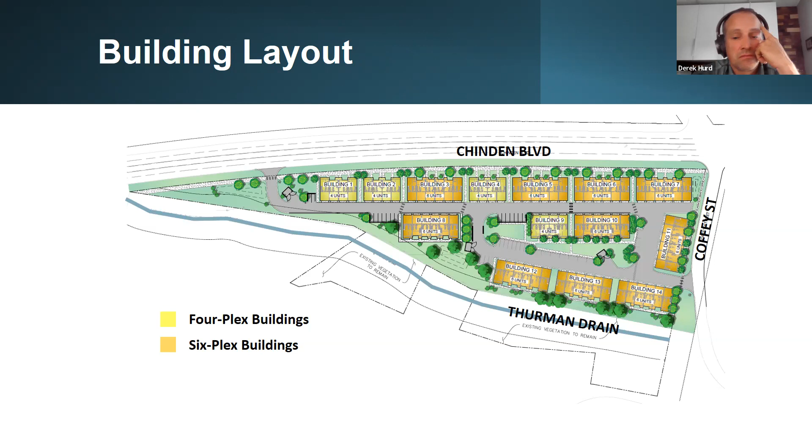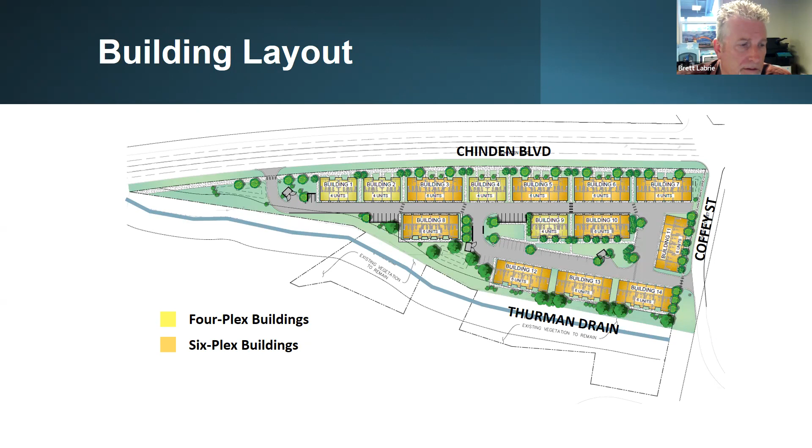So I would move to continue it to a date certain of the 29th of September for modifications as we discussed. A second. All in favor? Aye. Aye. Thank you.

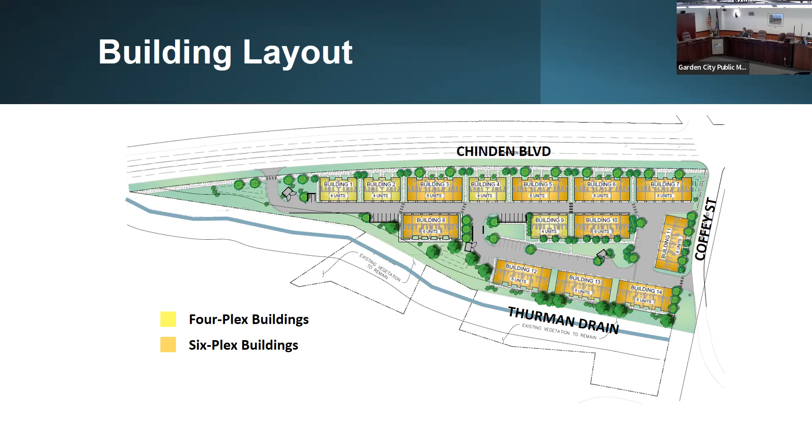All right, well, thank you, everyone. Again, thank you to the applicant and those who are in attendance for this item. And that brings us to discussion. As already has been alluded to today, there is the special meeting on the 29th and the meeting on October 3rd will be canceled. Is there any other items for discussion by the committee?

Any applications we've seen that have done anything in city council that was different than what we may have expected or new information? I don't remember if we've briefed you on the Petra Point application. I believe, perhaps we've noted that that was denied.

The applicant has requested a reconsideration, and a reconsideration was granted. So that hearing will be scheduled for the second city council meeting in October. Reconsideration by council, correct? And is that the one with the easement up the side of it on Adams? And that is it - so it's technically Allworth, but yes, Adams.